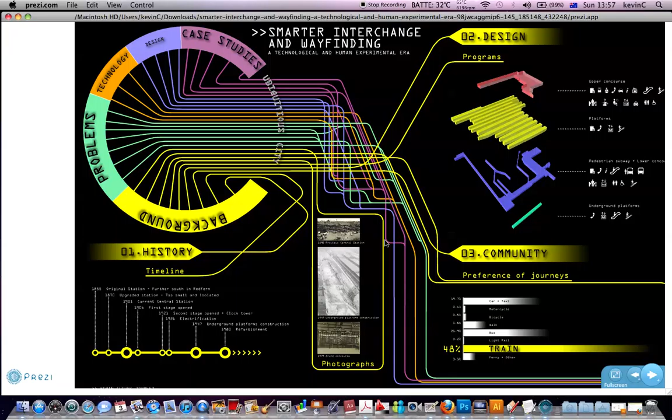First of all, I will talk about the history of Central Station. The current Central Station was constructed in 1901, so it's about 100 years old, more than 100 years old. During that time period, it received quite a lot of refurbishment and modification, such as the underground platform construction.

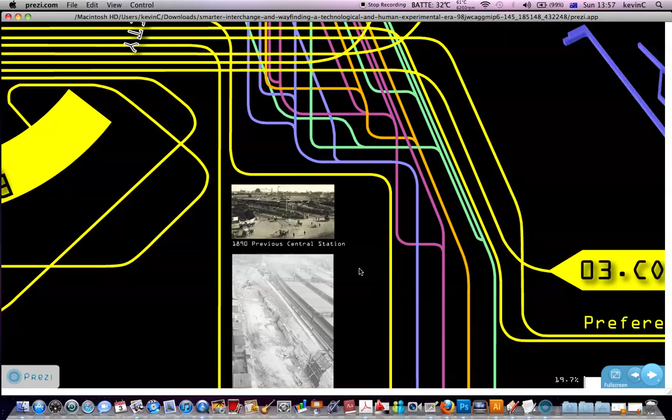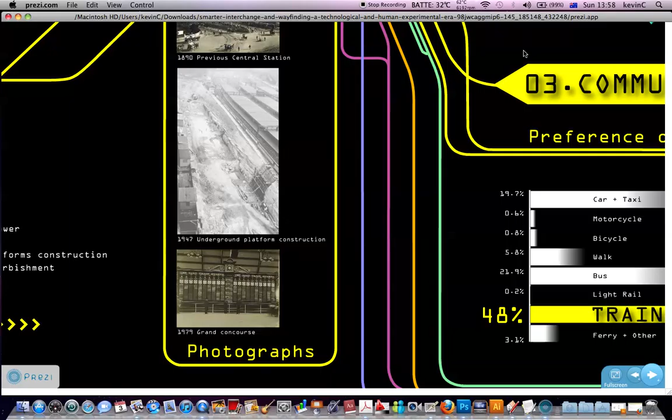Here's some photographs of the station. First one in 1890, the previous Central Station, and then this one was taken in 1947, showing the underground platform construction, and the one in 1979, the Grand Concourse.

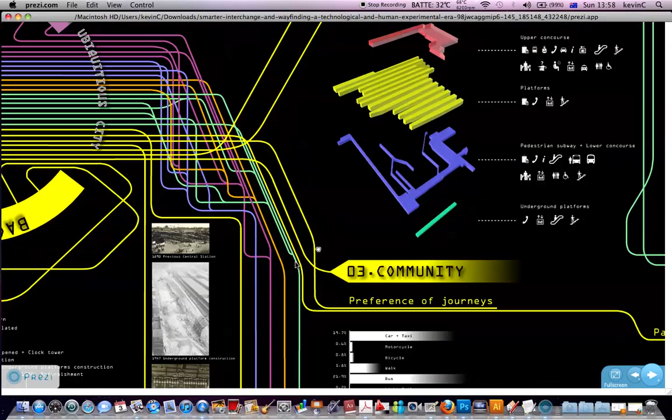Based on the changes and design in the past 100 years, here is the current programs and layout of the station. You can notice that the facilities mostly concentrate on the upper concourse, and the platforms are connected outside in a kind of wide spreading mode. There's one underground platform underneath the station, and the connection between these platforms and the underground platform is through the pedestrian subway and also the lower concourse.

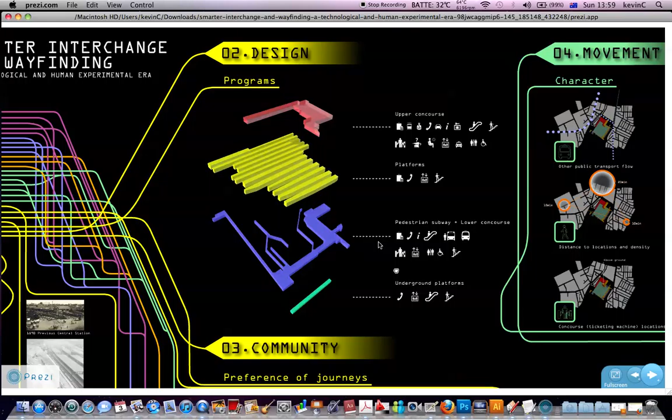According to the Australian Bureau of Statistics, preference of journey to work for the community is about 48% by train, 21.9% by bus, and 19.7% by car.

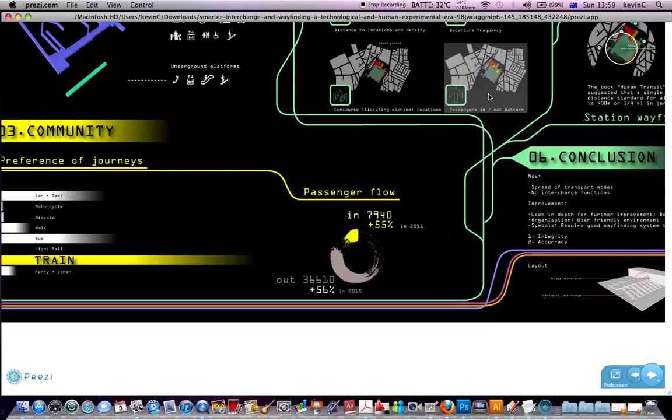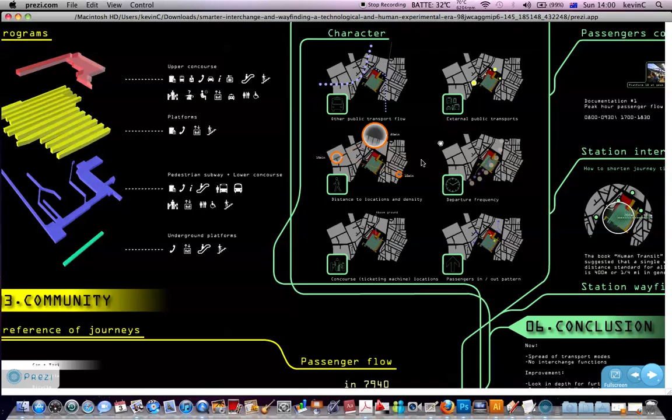It is forecast that the passenger flow in 2015 would increase by half at Central Station. So basically, the increase of passengers and also the layout create problems and issues in the station, and it might not be capable of handling the increasing passengers.

Here's some diagrams analyzing the movement of other transport modes and passenger flow. As you can see, the other transport flow circulates around the stations, and the external transport points spread on the western and also the northern side of the station.

Here is a diagram showing the walking distance to various locations and density. It's about 15 minutes walk to UTS and 20 minutes walk to the CBD, whereas 10 minutes walk to Surry Hills Community. However, people mainly concentrate in the CBD and also the university area.

The departure frequency is basically determined by the platform locations. As the suburban train lines are located on the eastern side, the departure frequency is a lot more than the country lines and interstate trains on that side.

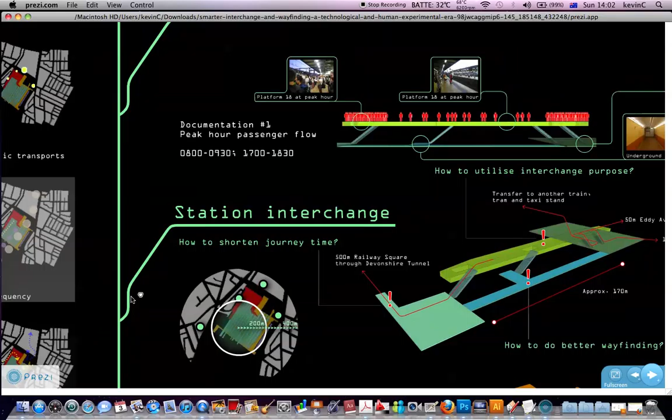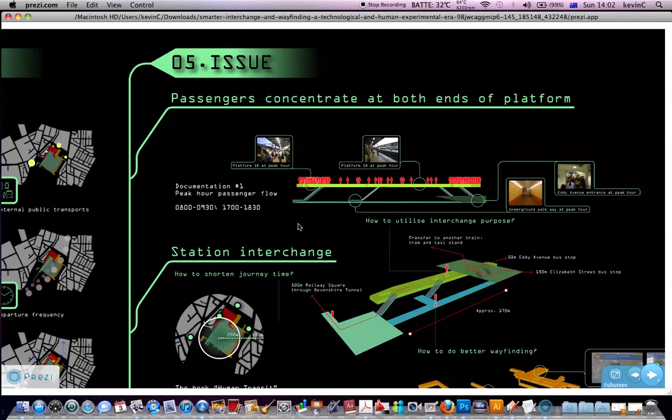Here's the issues that I observed in the station. The first would be passengers concentrating at both ends of the platform. I did a first documentation, going to Central Station and at peak hour to observe passenger flow in the morning and evening. No matter the time, passengers are likely to concentrate at the ends of the platform instead of moving at the center part or using the walkway underneath, because both ends of the platform connect to the nearest entrance and transport interchange facilities, whereas the center part has no further connections.

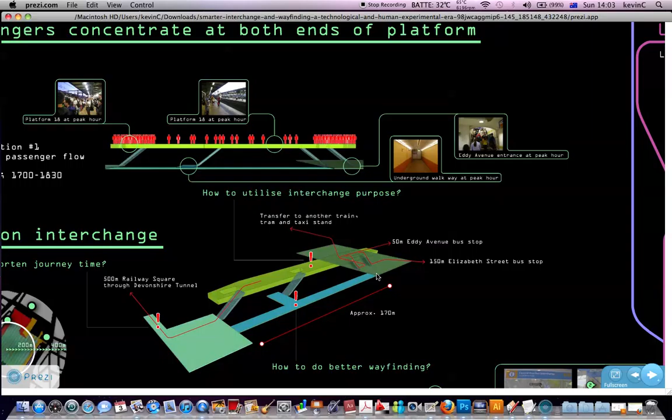They may need to walk approximately 170 meters to reach the concourse or other interchanging facilities. So the first question would be how to utilize the center part for interchange purposes.

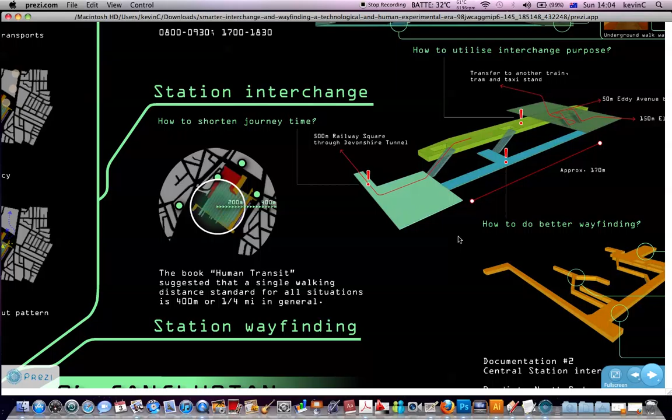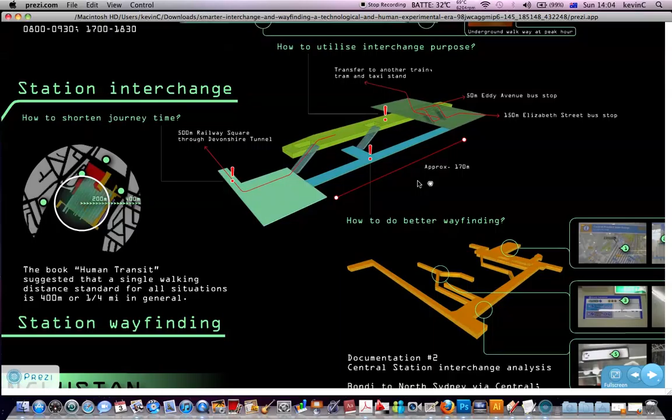The second issue in the station is about the interchange, specifically how to shorten the journey time. When passengers get off the train at the end of the platform, say for example they need to change to the bus at Railway Square, they need to walk through Devonshire Tunnel for 5 minutes, approximately 500 meters away from the facility. According to the book Human Transit, a single walking distance standard for all situations is suggested to be 400 meters or a quarter mile in general. So the interchange time and distance here is a lot more than these suggestions.

The third issue is station wayfinding. Station wayfinding is important in shortening the interchanging time, because it helps you find the way to various locations.

I had another documentation in the station, about Central Station interchange analysis. Here are the conclusions. First, the bus interchanges for various locations overlap too much around the station. And the map inside the station is a problem, because it doesn't show where I am at the moment. I have to read the map by myself, find my way, and try to figure out the locations.

And then at some point the directions to the destination disappear, covered with white paper without showing the direction, for example to the Devonshire Tunnel or Railway Square.